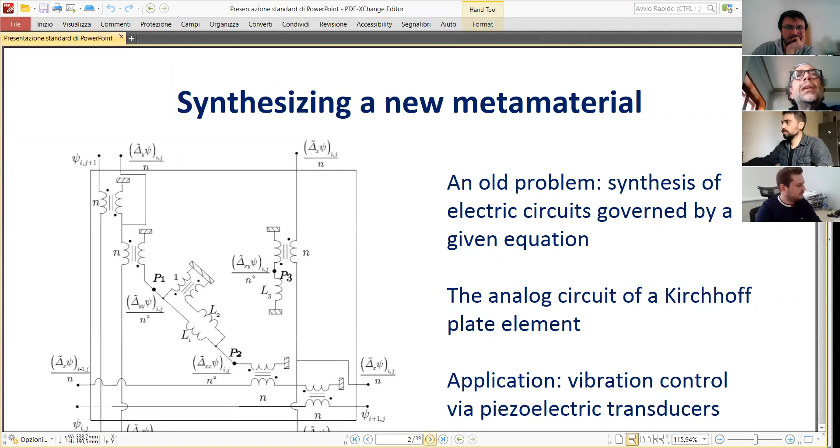Then I will only talk about one specific equation, which is this one — I don't know if you see it fully. This is a deformation energy, where F is the gradient of placement. We are talking about a plate, and you have two directions: the direction of this beam, which is D1, and the direction of that beam, which is D2. This is an energy which we want to synthesize.

So given this energy, we want to find a microstructure which, once homogenized, gives you this macro deformation energy. Mathematically speaking, you have shear, which is given by this term, which is the measure of the deformation energy related to this change of angle you see here. Then you have elongation, the elongation of one of these or the other beam, and it is represented by this term in the energy. After homogenization, I mean, when you have many elements of these which are reproduced in your system.

And this is the bending term, which involves the gradient of capital F, therefore the second gradient of placement. Even if the technical details are not very important in this context, what I did, giving this energy, I have found a microstructure which, once homogenized, gives you this deformation energy.

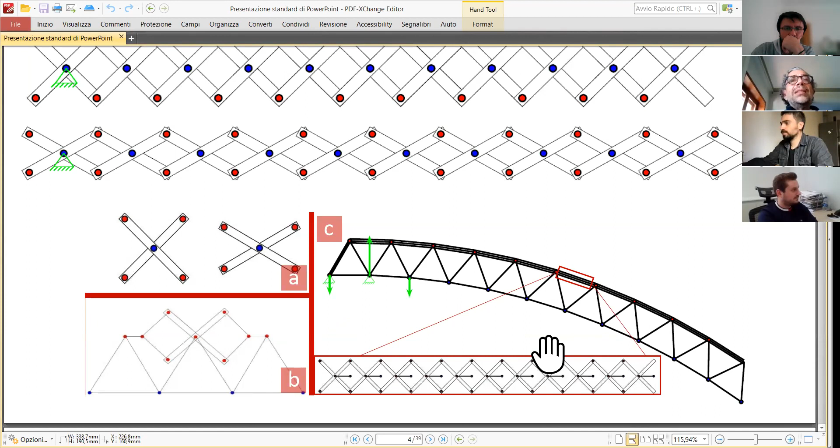I could also invent a material like this one, which is made of two families of orthogonal pantographic beams, and these deformations which you see here are all with zero energy if the pivots are perfect.

So you have a material which deforms in a homogeneous way in the plane without any deformation energy, which is what we want, because when you introduce a very small deformation energy related to the angle change in a pantograph, then you get...

A material which I can call a bipantographic sheet. This bipantographic sheet has a deformation in the plane, homogeneous deformation, if the pivots are perfect, which is totally energy free. So in a sense, they are what mechanical engineers call a machine, because you have degrees of freedom and the system is changing without a lot of deformation energy from one configuration to another among the allowed ones.

Once you homogenize this material and add a small deformation energy related to the shear deformation, then this becomes something which can be used in large deformation, remaining elastic in large deformations. Are these dreams only dreams, or can they be transformed into real life objects?

Okay, we printed this structure. If you see, we tried to get perfect pivots in this specimen as quasi-perfect pivots.

This material is made of two families of mutually orthogonal beams in the reference configuration. They intersect by means of some cylinders, which we call pivots. Perfect pivots have no torsional energy, so there is no shear macroscopic energy when you deform this sheet.

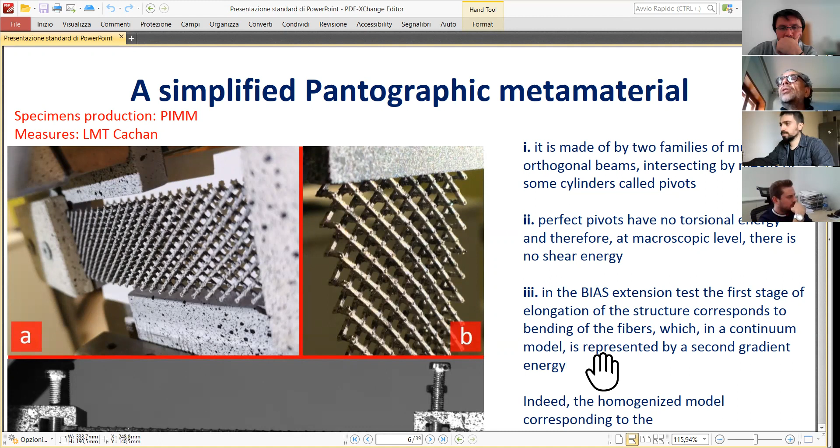In the bias extension test, the first stage of elongation of the structure corresponds to bending of the fibers, which in a continuum model is represented by a second gradient energy, which is rather unusual. In the deformation energy, you have a second gradient of displacement, which is rather rare in the literature.

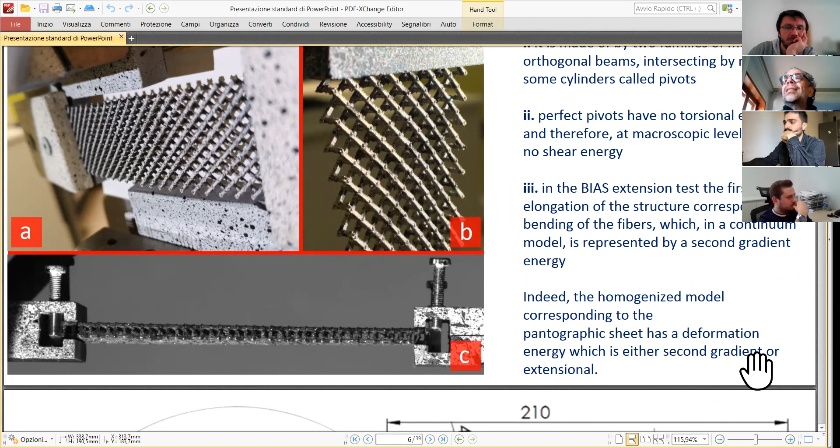Why is all this happening? Because the homogenized model corresponding to the pantographic sheet has a deformation energy, which is either second gradient or extensional. Either you have an energy related to the second derivatives, bending of beams, or you have an elongation of a bar constituting the system.

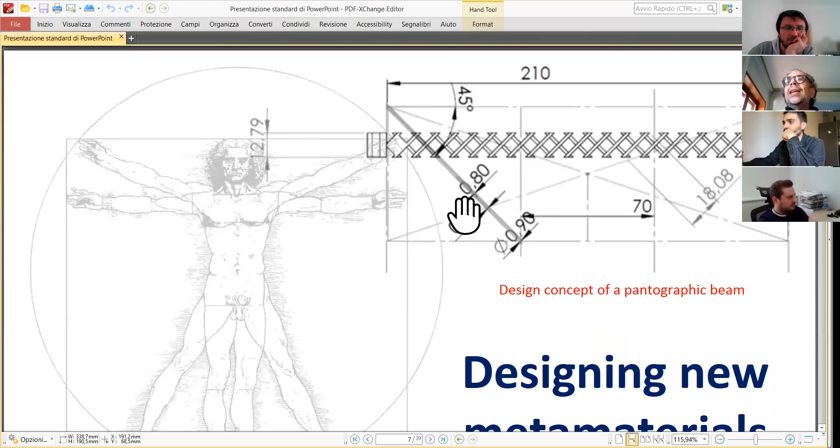A pantographic beam by itself is designed and printed rather easily with 3D printing machines, and you see that this is the shear deformation of this beam.

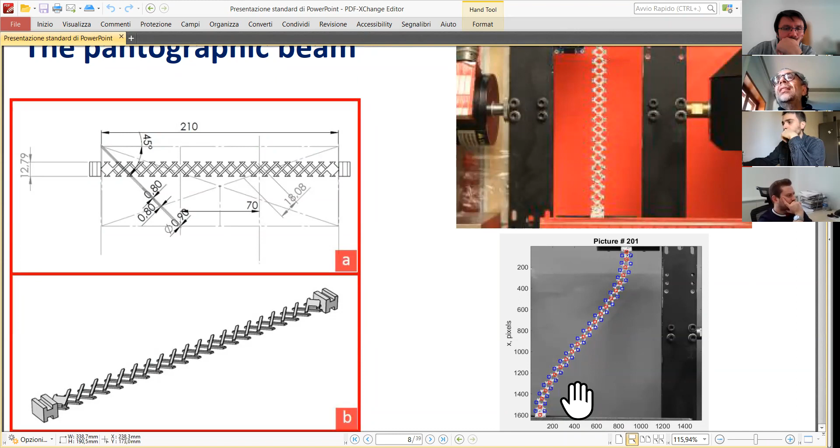This picture has been made in Berlin, and the dots are needed for following, in the digital image correlation, the displacement of this structure.

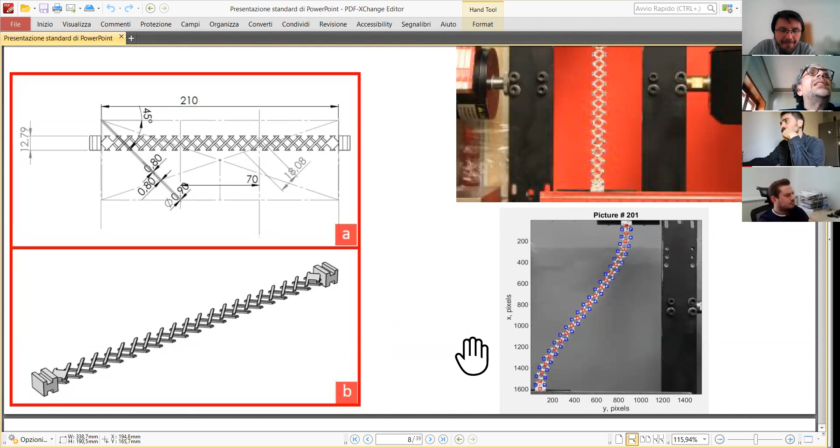By the way, it is rather difficult to teach software how to follow a mechanical system deformed in large deformations. We need a very sophisticated digital image correlation system, which I will describe later. Unfortunately, I don't have the movie because I'm using a computer which is not mine.

However, I can tell you what happens, in words: this beam behaves, in a range of displacements, like a beam. When you reach a threshold, it becomes a cable. So you have a kind of phase transition.

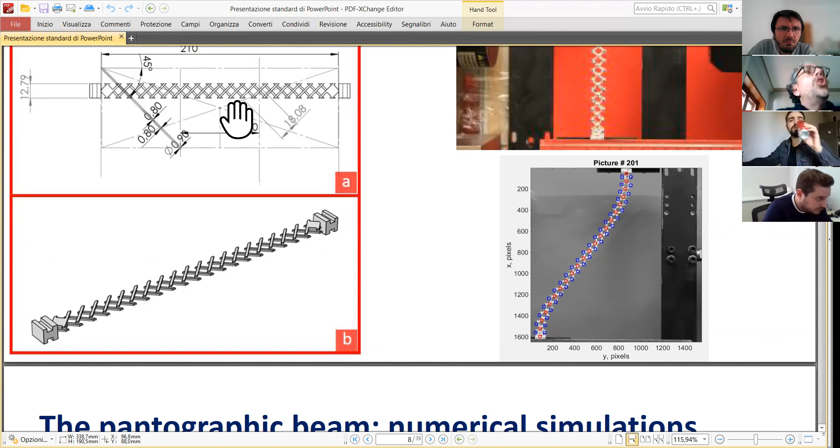When these two beams here, constituting the typical element of our structure, become parallel, then it becomes like a cable, because here you have pivots which are perfect at the top and at the bottom. So you have small segments which are articulated like a catenary in a sense. So this metamaterial has a mechanical phase transition inside.

However, many persons, when I described what we are doing, criticized our conception, because they said, okay, can you print perfect pivots? Now, the answer is yes, we can do this.

And this is the 3D picture of the CAD file which we have used. You can see here that this is exactly an internal cylinder. You have an external cave cylinder, and the internal cylinder is connecting the top bar and the bottom bar for getting a system of perfect cylinders, those typical of standard mechanical engineering.

And we could print the specimen, which is, this is the picture of the specimen, and we could prove experimentally that the behavior which I described to you before, so with this kind of deformation energies, which are associated with a very low deformation energy, are feasible experimentally.

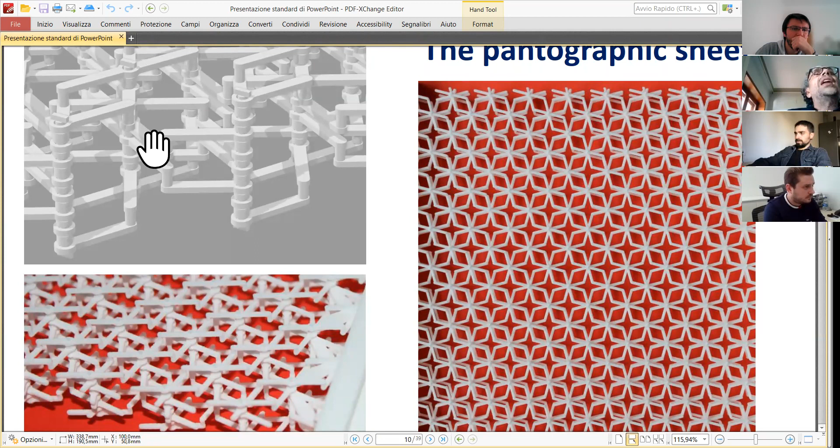The dream is, I mean, this is a big cell. The dream is to be able to build these metamaterials with small cells. So the idea is to build a kind of tissue based on this microstructure.

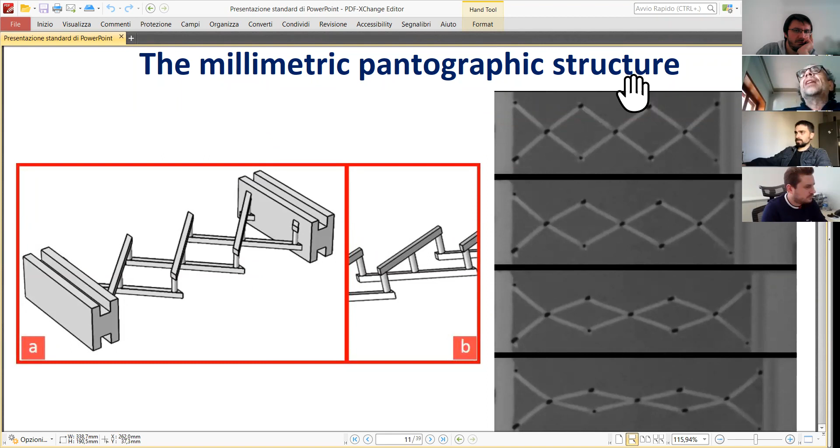And this was made when I was in Berkeley, where I met Erden. We started printing millimetric pantographic structures, which have been tested and fully studied in Kansas University, where Professor Anil Misra is working. And what we discovered is that the pantographic structure has a peculiar feature.

Its mechanical behavior depends on the mechanical behavior of this small pivot. When you change the diameter and the height of this pivot, then the overall macroscopic behavior of the system changes dramatically. Actually, for a fixed height, we could prove both theoretically and experimentally that the torsional stiffness, so the shear stiffness,

at macro level, in this figure here, you see the change of angle from here to there. So you have a shear deformation at macro level associated to a torsional deformation of this pivot.

We have proven that it goes with the fourth power of the diameter of this pivot. So a very small change of this diameter causes a large macroscopic change of mechanical behavior.

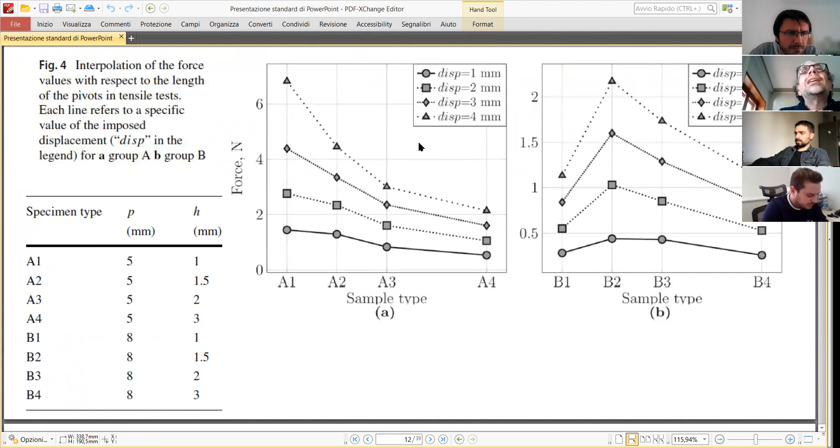This is also proven experimentally with pivots of different types. We have A1, A2, A3, A4, B1, B2. They are pivots. Here are the dimensions of the pivot in the millimetric structure, this one, okay?

When you impose this displacement here and you plot the force as a function of the displacement, what you get is that for a displacement of 1 millimeter, you get this force. For 2 millimeters, you get that force, and so on. So you have the dependence of displacement versus force.

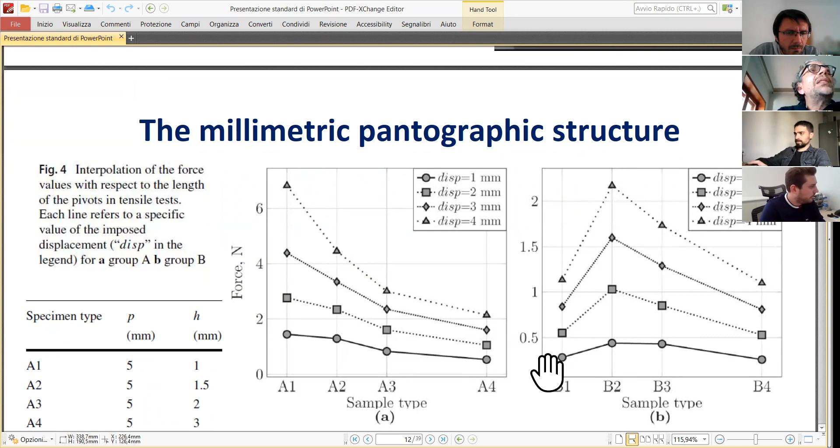And what you see with B2 specimens, so with a specimen having this B2 dimension, you get a maximum of the exerted force. And you can range from 0.25 up to 2.25, simply changing the parameters characterizing the microstructure.

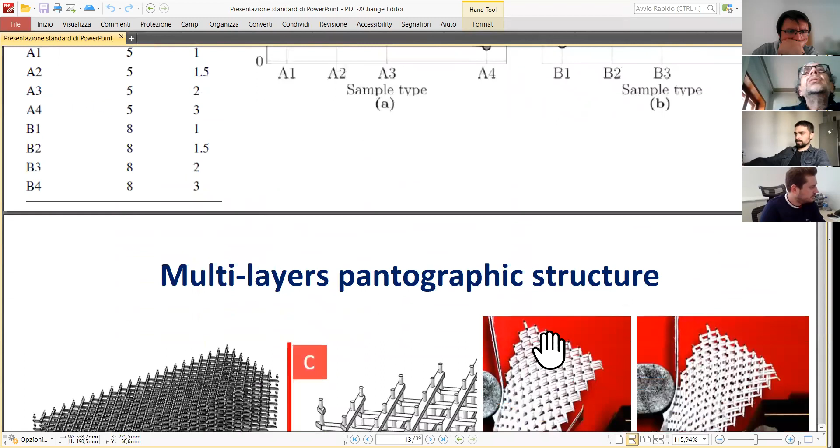So what it means is that with a very small change of volume, so changing a little bit the diameter of these pivots, you can get a macrostructure whose mechanical behavior is dramatically different.

Then we superimposed several layers of pantographic structures, and we have found that in a 3-point bending test, superimposed layers of pantographic structures have this very peculiar behavior. By the way, this deformation is fully elastic. If this moves up, the pantographic structure goes back to its original shape.

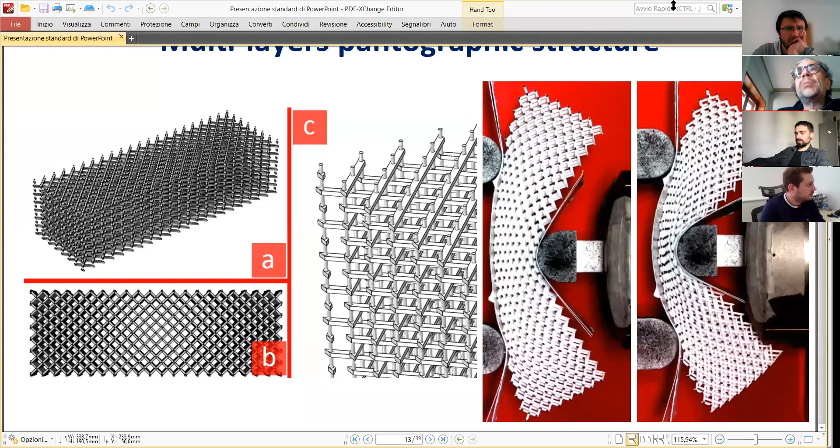And this effect can be very useful, for instance, in energy damping device. And with Erden, we are trying to exploit this effect in a specific problem in mechanical engineering.

So the question is, the technological bottleneck is how to design and print perfect pivots. As I already told you, perfect pivots seem to be very important.

Indeed, they are. But many persons were skeptical about our capacity of using 3D printers, leaving here, of course, in this drawing - it is exaggerated - leaving here the space, allowing for the relative rotation of this beam with respect to that beam. Okay, what happened is that we managed to do this.

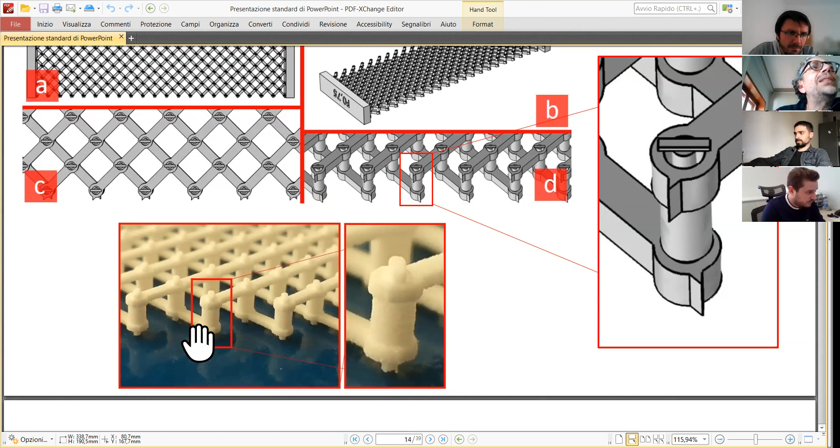We did it in Warsaw, and using a Formiga P100 printer, we could get specimens in which, without doing anything else than 3D printing, there are parts inside the printed object which move one with respect to the other.

This fabrication process up to now has been successful only with plastic pivots. With metallic pivots, this design is not working.

However, recently I started a collaboration with Fraunhofer Institute in Freiburg, and they are able, by changing this design and inventing a new design, to have a 3D printed structure in which metallic parts are moving one with respect to the other.

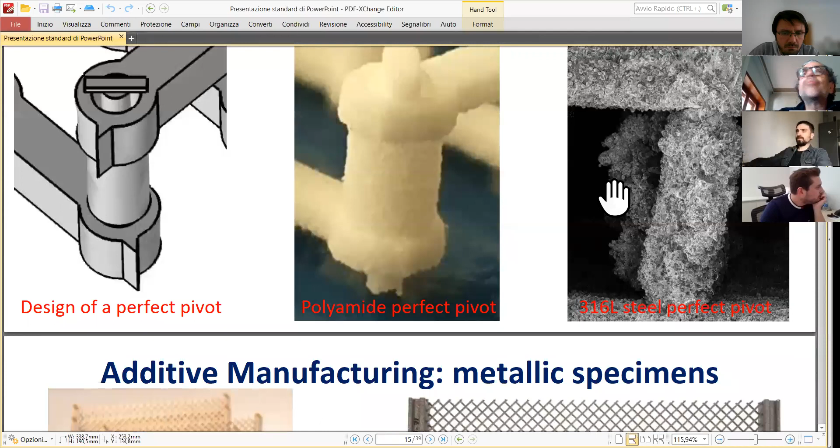So in the additive manufacturing of metallic specimens, we are having serious troubles. This is a specimen after printing. They need to be thermally cured for becoming straight, and it can be very difficult. But at the end, at the Fraunhofer Institute, they did manage to get straight specimens. However, we discovered, this is a microscope picture, that these pivots are not rotating, and they are broken after deformation in this way.

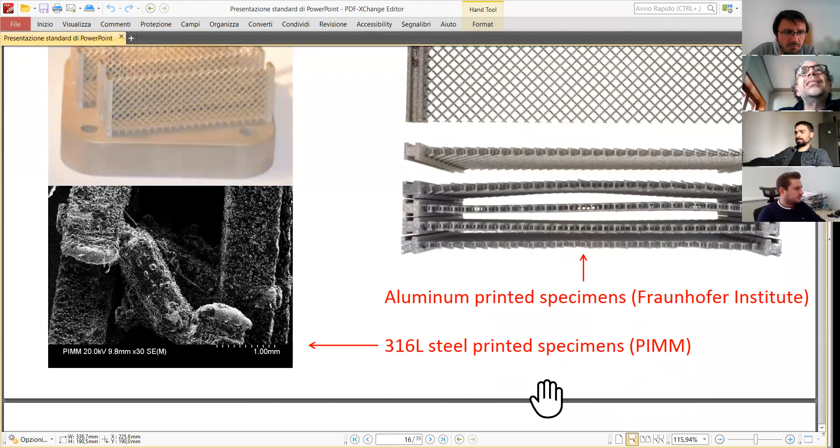So we needed to develop a better design. This is a rather difficult problem in mechanical engineering for getting perfect pivots, which at the end could be printed also in metal. Even if I don't have pictures here, we did not publish the papers yet, and my co-authors did not allow me to show you the design.

If you zoom at different length scales, the specimens we are considering, at this length scale you can use the model beams. If you zoom in further, you can use only the three-dimensional continuum model, which, by the way, if you look at the grain size, is rather inhomogeneous. We'll come back to this point later.

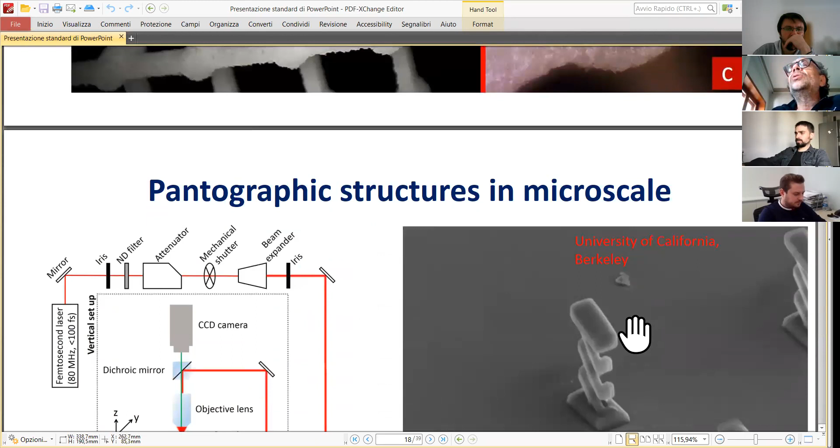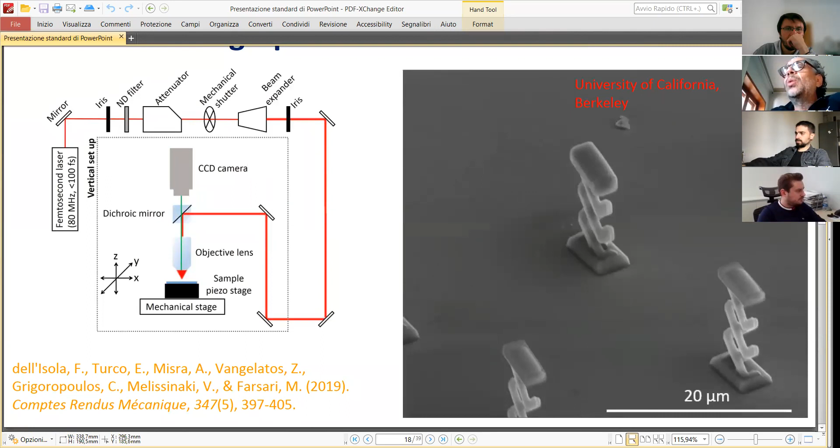As I told you, when being in Berkeley, we decided that we wanted to do better. Zacharias Vangelatos, who is now working in a company and left academia, had the clever idea of printing these specimens, which are 20 micrometers. These specimens have been tested, and we could prove that what happens for millimetric, centimetric, millimetric pantographs still occurs in micrometric pantographs.

So what we are studying is not the specific material or a phenomenon which occurs at a specific length scale. We are studying the mechanical behavior of a microstructure, and this is very important for what we are telling.

This is confirmed by a casual circumstance. Two colleagues from Germany, the family Hesch, husband and wife from University of Siegen, Christian, I'm sorry, I forgot the name of his wife, they studied this tissue. This is a standard tissue made of carbon fiber, embedded in a matrix of a polymer. And they repeated the bias test.

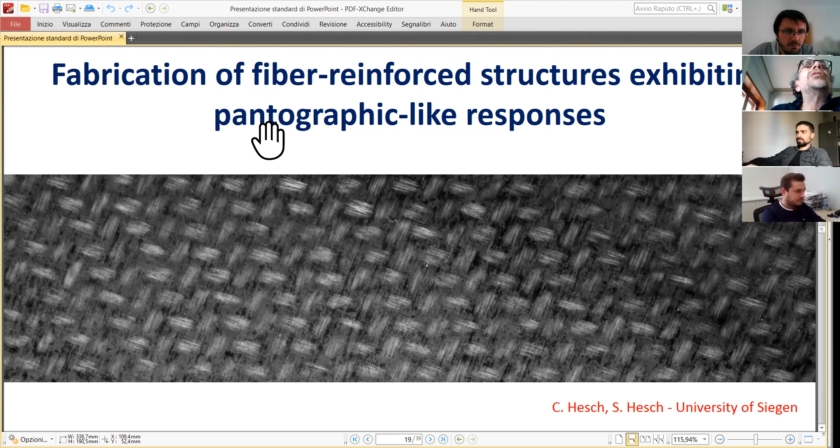In this region, the warp and the weft, the fact that the fiber goes down and up and the other fiber goes up, produces a kind of pivot. And actually, this material behaves like a pantograph. It has a pantographic-like response. So this is a property of materials having a certain microstructure.

So whatever is the lower scale material you are using, aluminum, nickel, polymers of every kind, or carbon fibers, the dominating mechanical effects at macro level are dictated by the pantographic microstructure. And this is a small theoretical discussion which we are trying to develop.

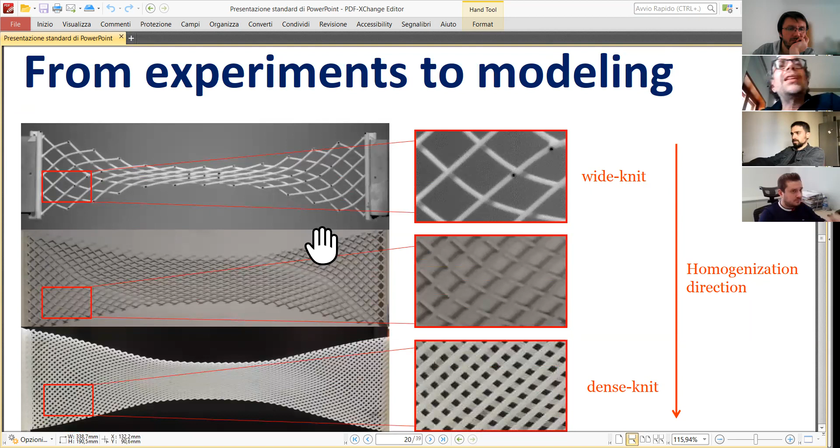The theoretical discussion is about homogenization. If you use this wide knit pantographic structure, this intermediate knit, and this dense knit pantograph, you discover that at macro level, the behavior of all these three is the same. And this is rather unexpected. We should find theoretically the reasons for which this is true. All these three structures behave governed by the pivots properties and the bending stiffness of involved beams.

However, here you have a very nice phase transition. When beams touch one with the other, in the center of this material, you get a standard three-dimensional continuum, exactly as those which we are studying and teaching for our students. So you have a kind of second gradient material, which after a big elongation becomes a first gradient material.

If the mechanical properties and the geometrical properties of the considered architectures are well optimized, then your material remains in the elastic regime when it arrives at this level. So you have a material which for certain displacements behaves like a second gradient material, so large elongations are allowed, and when you reach a given threshold, it stops behaving like a second gradient material and starts behaving as a standard one.

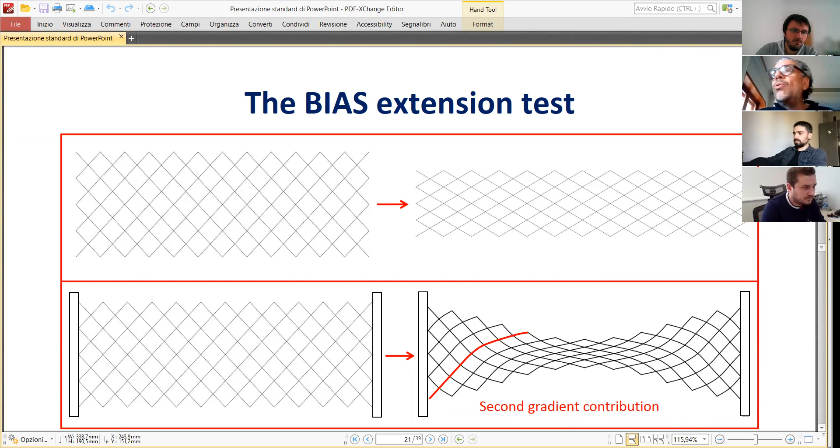If you block the distance between these beams and you elongate, then the bending of the beams becomes dominant in the deformation pattern. Everybody knows that in the deformation of a beam, second derivatives of displacement occur, and at macro level, after homogenization, you get a second gradient continuum.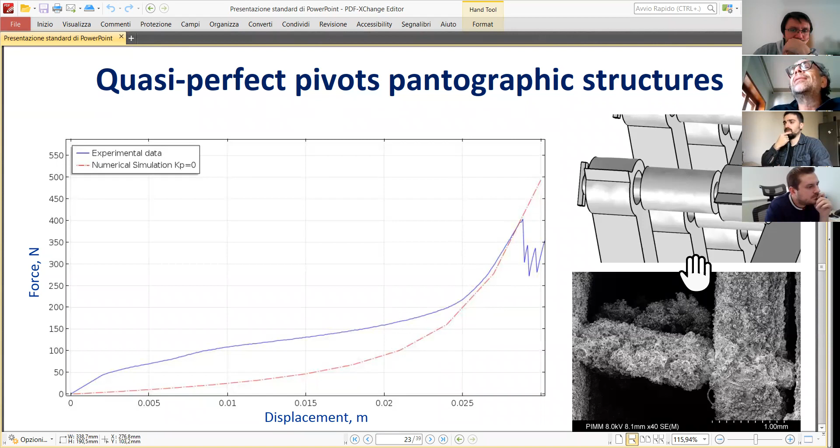Then when we made experiments with so-called quasi-perfect pivots, pivots which are nearly perfect but not printed exactly as they should be - in red, you see the plot of the numerical simulations forecasting the behavior of a perfect pantographic sheet, and in blue, you find the experiment. So you see that more or less, we are going towards the desired behavior in our experiment.

And this is the experimental plot also after rupture, when you have the famous phase transition I was talking about. So the beams are touching one with the other so that you have a stiffening of your material. So you have a kind of material which has a certain stiffness in one deformation regime, and a much higher stiffness in another deformation regime.

If we manage to design the pivots and the structure in an optimal way - and I have partial results in these aspects - then we will have invented the two-phase material which we are looking for: first phase, second gradient; second phase, first gradient material.

Now, somebody told us that this specimen is behaving very well, but it is useless because it could buckle, it could not resist in shear.

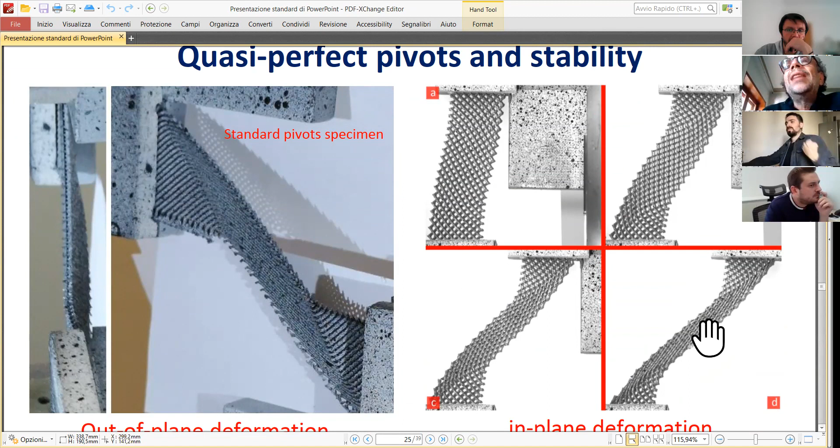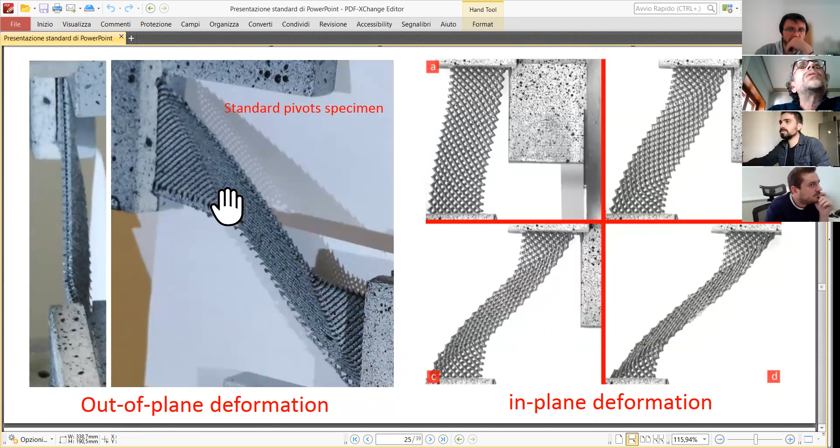So we developed shear tests, again in Berlin, and this is a very nice pattern of deformation. As you can see, this specimen still behaves as a second gradient material also in shear deformation. The only problem is that sometimes this material buckles, so it gets out of the plane of deformation, but in a way which is not catastrophic, and by the way, totally described mathematically.

These specimens are damage tolerant. This is a specimen which, for a reason we could not understand, has been printed with some small defects.

So while testing it, we had some jumps in the plot of displacement versus overall force. By the way, we are talking about 100, 200 newtons, so it is rather stiff for being such a light, not heavy specimen. So what happens? One beam is broken, but it keeps doing its job.

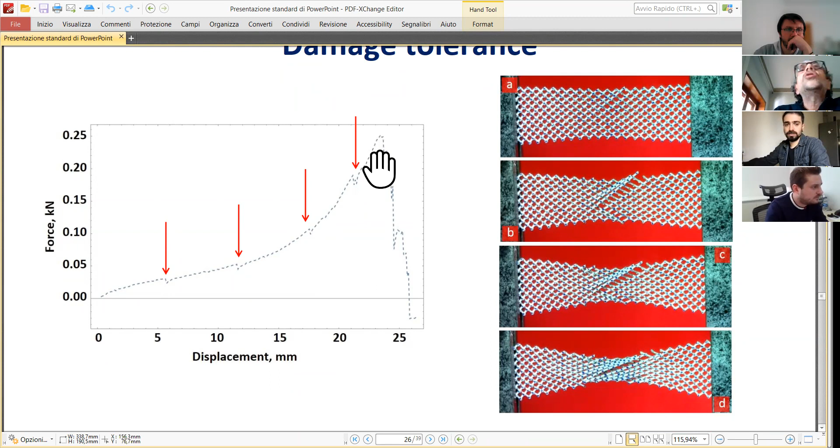So we are optimistic that this microstructure produces a damage-tolerant metamaterial.

I hope that you allow me 2 minutes of philosophical considerations, only 2 minutes. Without a theory, you cannot design experiments.

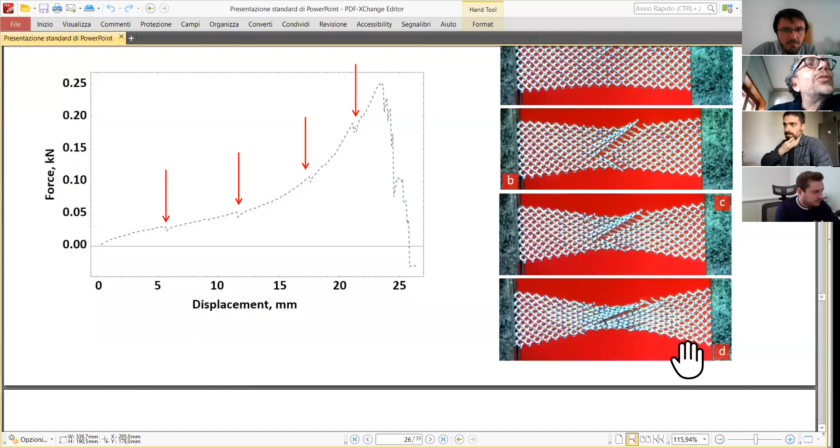We could design this metamaterial simply because we had a very careful mathematical model and very good numerical simulations, which allowed us to forecast the behavior of the specimens which we were going to build. Of course, if in the building you have defects, then you get a different behavior. It is rather difficult to get such a well-ordered microstructure, but actually we are succeeding in this.

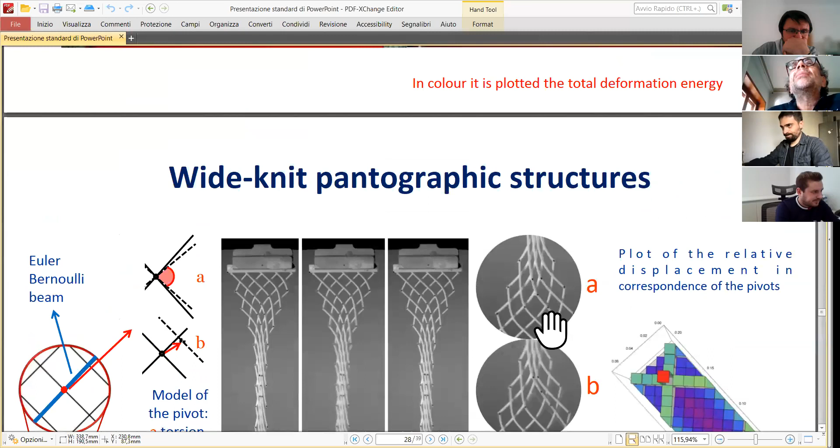We discovered that there are other damage patterns. So for instance, look, this pivot inside is broken. So we discovered that our mathematical model, the one which has directed us in this part of experiment, was not...

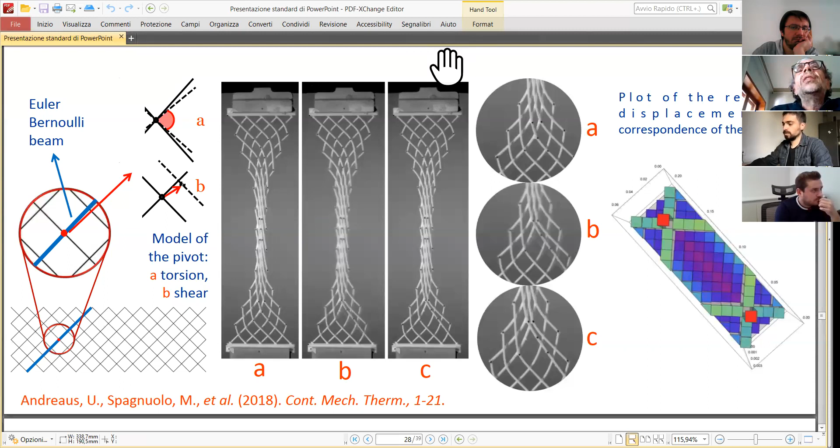...efficient enough. So we were obliged to modify this model. And we did this in this paper here. And in this paper, we introduced one displacement, always a homogenized model, but one displacement for the upper array of beams and another displacement for the lower array of beams. And we introduced an elastic energy describing the behavior of one pivot.

So either we have a one field model or a two fields model. In the one field model, you can describe only this rupture phenomenon, which is related to an elongation of one beam. So you have a kinematical descriptor for this elongation. Instead, with a one field model, you can never describe these other two mechanisms of rupture, which occur in some pantographs with some microstructures.

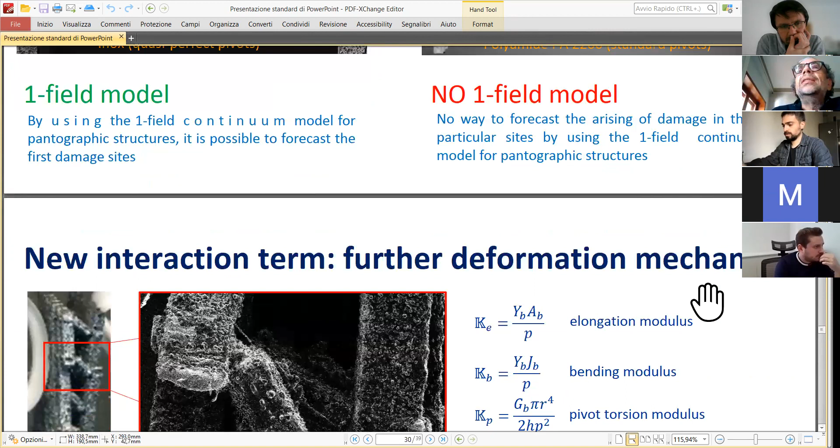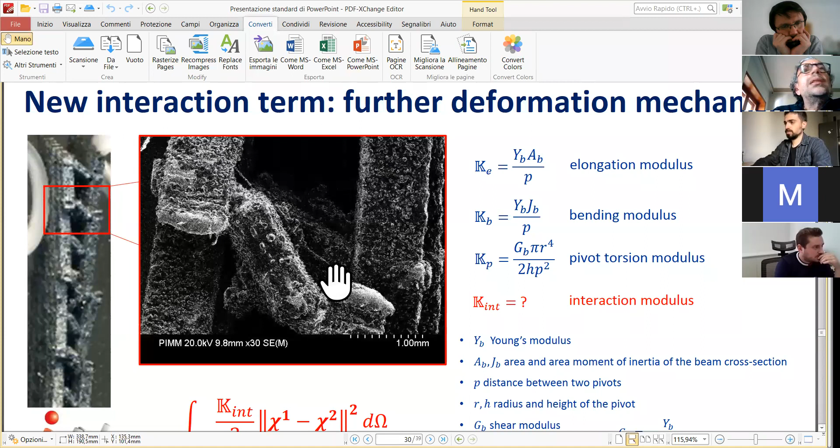So what we did, using the pictures we have about one pivot, we imagined a deformation energy. So together with elongation modulus, bending modulus, pivot torsion modulus, which at macro level becomes shear deformation, we invented an interaction modulus.

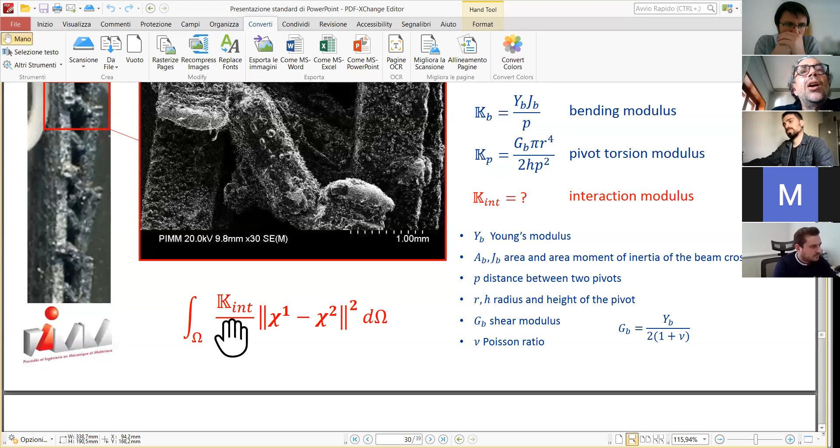And we added in the energy the distance between the placement of the upper layer of beams minus the placement of the lower array of beams, times this stiffness. This is the standard stiffness of a spring.

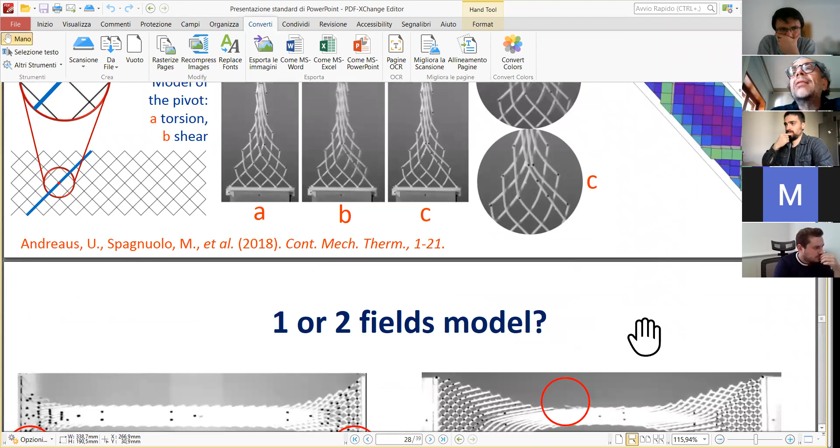And using this energy, we could prove that the concentration of deformation energy in the pivots are either here, causing this rupture which we have described there, or here, causing the rupture which is described there.

So, standard continuum models are not good for describing these systems. We used a second gradient continuum model, a model where the second gradient of displacement appears.

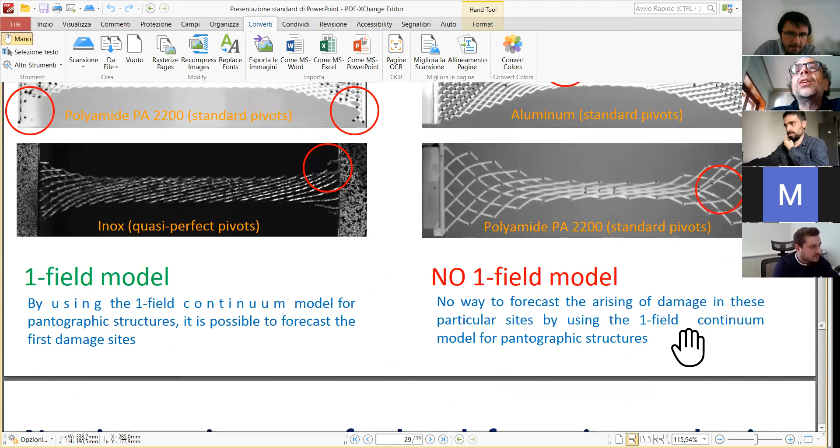Actually, we invented this microstructure for finding this kind of behavior. Then this phenomenology urged us to develop a two-field model, and using this two-field model, we did manage to describe also this rupture phenomenology.

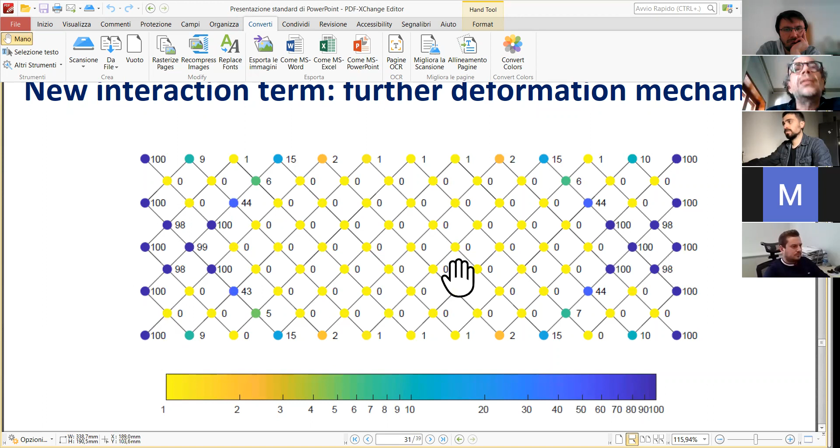And we optimized this specimen choosing the correct stiffnesses in order to have the rupture here the latest possible. So we found the distribution of torsional stiffnesses of the pivot such that the elongation was minimal, the elongation of each of these bars all along the structure. In this way, with this distribution of stiffnesses, we can increase by another 20% the maximum elongation before rupture, enlarging the elasticity domain of this new metamaterial.

Okay, now another question, I have 7 slides before ending. One could ask me, why did you study continuum models for these structures? The question is that we can have meso models introducing beams or micro models describing every beam at micro level, at the level of the grains, using a standard 3D continuum model.

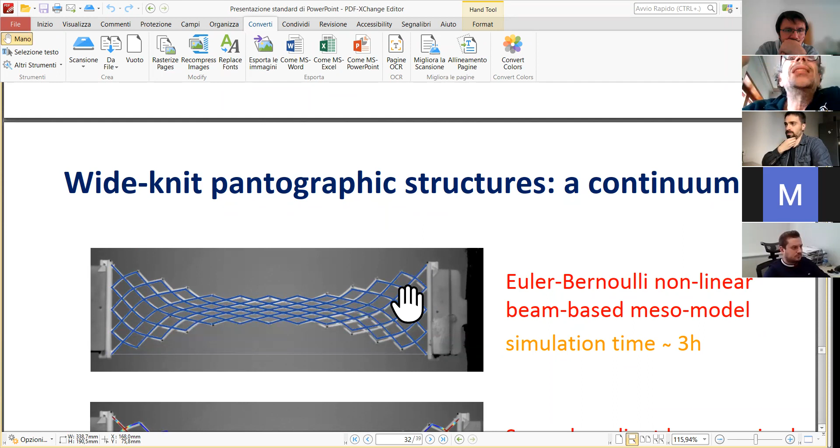Using Euler-Bernoulli nonlinear beam-based meso model, we needed 3 hours for doing this numerical simulation. Using the micro model for Cauchy continua, we needed 3 days. It was 4 million degrees of freedom numerical simulations, and we have a rather good computer which cost us 12,000 euros.

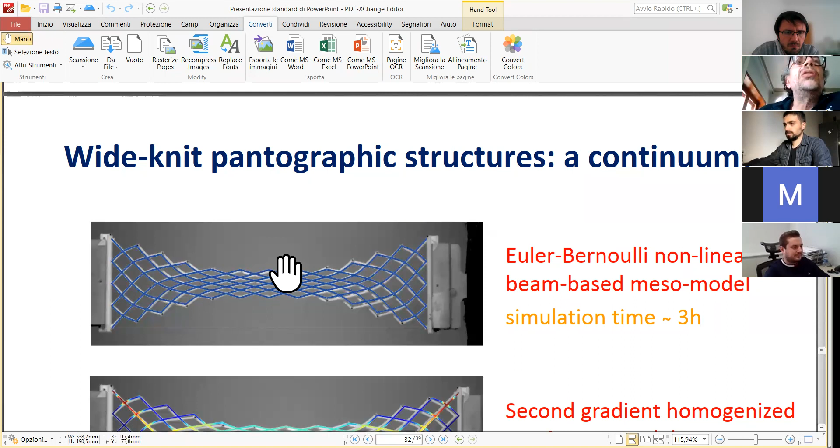So we needed a lot of time for getting this prediction in the nonlinear regime. If instead you use a second gradient homogenized continuum model, you need 3 minutes. Now, if you want to find this optimized scheme, you need to solve the elasticity equilibrium problem several millions times.

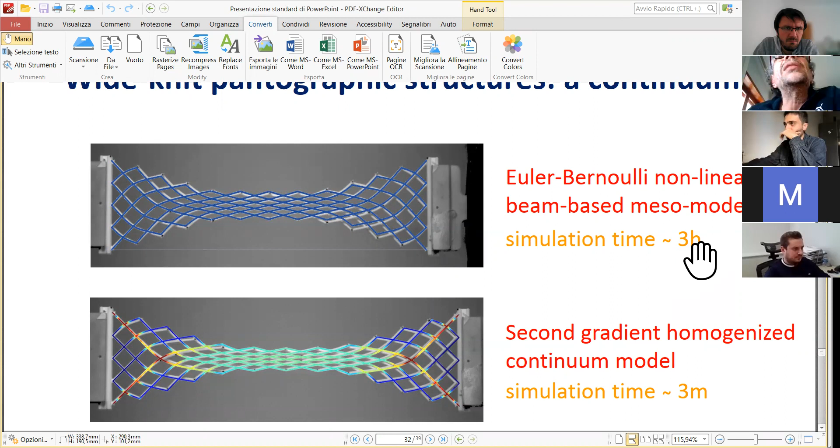So if each simulation lasts 3 hours, you are lost. You cannot find the optimized structure. If you have 3 minutes, this is feasible, and we did this.

Okay, now I want to give some hints about what we have done with image analysis for checking the quality of our theoretical models. Now, also in image analysis, you can have different layers, different length scales in analysis.

If you study at this length scale, you can use a mesh like in the digital image correlation scheme. If you want to use a meso model, the mesh is one that finds every beam with a small number of elements, fundamentally 3 finite elements. If instead you want information about what happens at the grain scale, you need a further detailed mesh, also in digital image correlation.

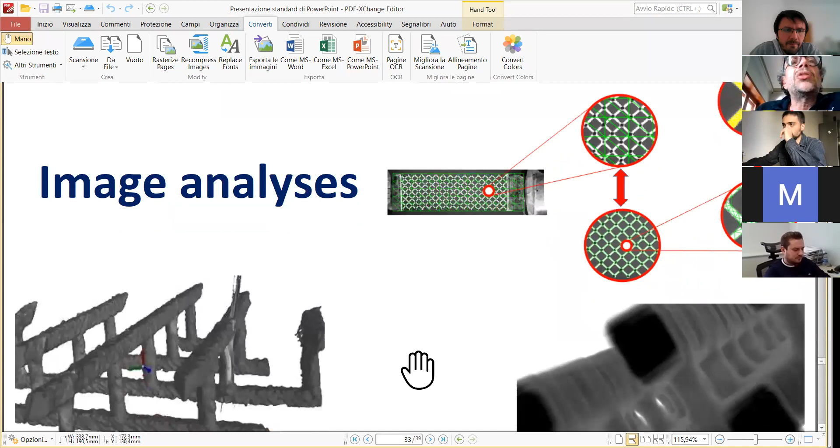In the École Normale Supérieure de Cachan, now Paris-Saclay, we did tomographies of these specimens, and this length scale could also be reached.

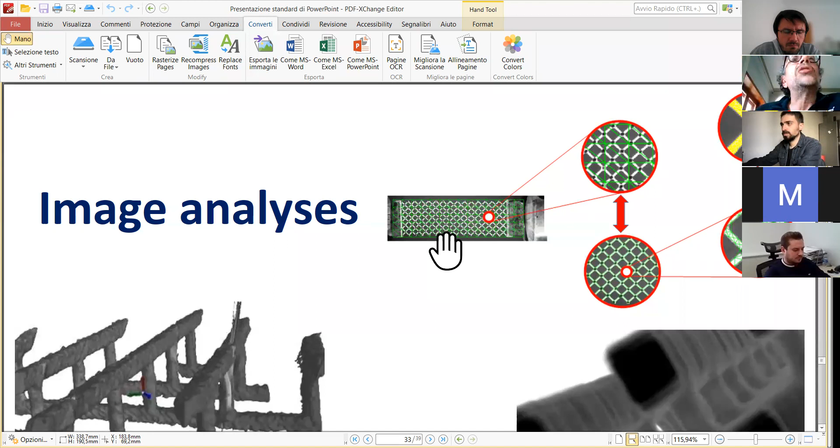Now what is very interesting is that using digital image correlation, you need to tell the numerical scheme elaborating images where it has to find a certain part of your structure. Because in large deformations, it is not obvious. Imagine the poor software, how it can understand that this cross is here and not that one in the actual picture.

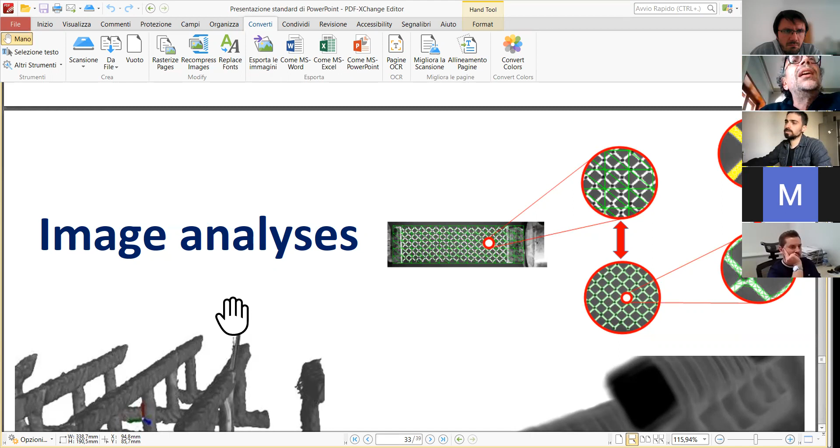I'm very proud to be co-author of a paper whose main idea was by Francois. In the digital image correlation scheme, he used the theory. So what he did was tell the software to go and look for the speckled pattern in the reference configuration, deformed in this way, in this place, and try to find it. This place and the speckled deformation were calculated using the mathematical model which we gave him. So digital image correlation is driven by the theory, as everybody knows well if he studied a little bit of philosophy of science.

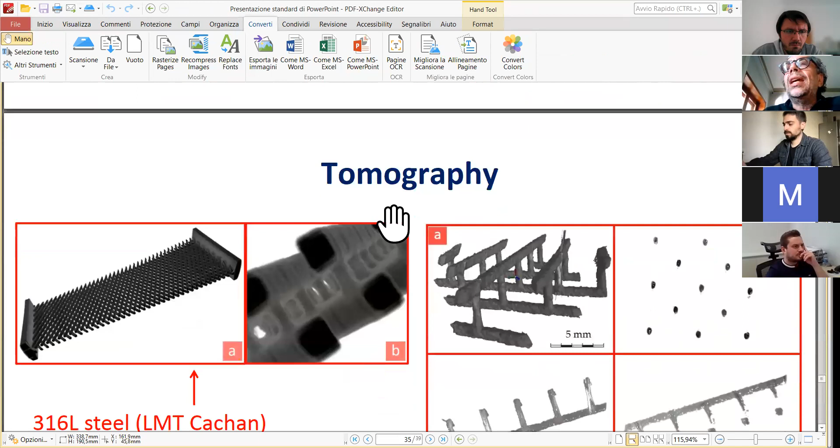We also did experiments in Stockholm on the dynamics of these specimens. I'm rather late, but I'll tell you we got very nice agreement between our theory and measurements. I show you some tomographic pictures made in Fraunhofer and in Cachan, which describe in greater detail how the specimens are made.

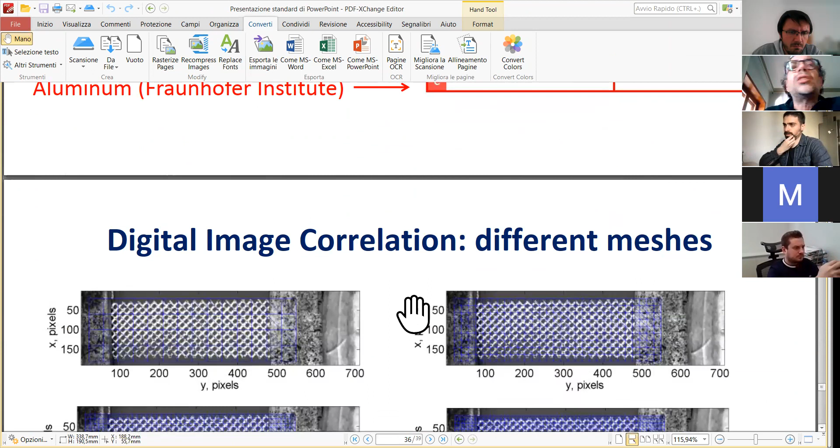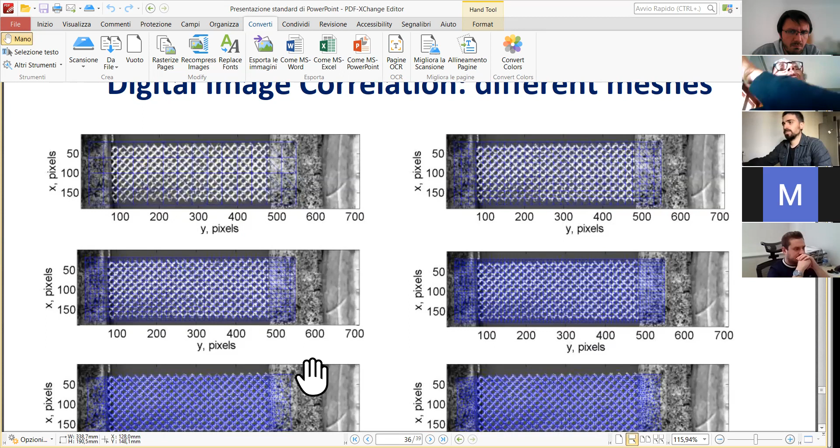I mentioned digital image correlation with different meshes, so you have different meshes and different analysis at different length scales, with different models used for following the deformation patterns. This is what was called the backtracking procedure: you know where you are looking for a certain deformation pattern, and then you go and find it where you predicted it should be.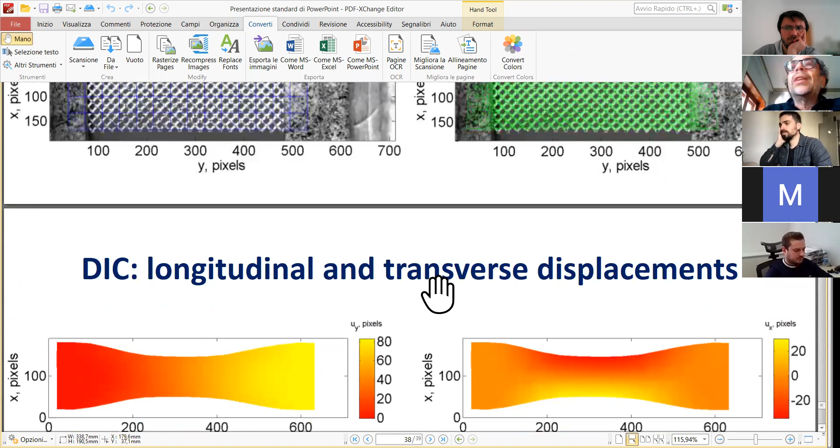You get this digital image correlation using a continuum model, and this digital image correlation using the meso model coupled with meso digital image correlations. At the end of the story, which is the lecture we should learn, you have this system. Forget that I invented it because I needed a second gradient material—this system exists. So how do you want to model it?

If you are happy to average what happens in this square of 5 millimeters side, then you can model this with a second gradient continuum. Of course, the second gradient continuum doesn't tell you in detail what happens at 1 millimeter length scale—it gives you only an average deformation, which is the advantage of second gradient continuum theory. You can get quick numerical simulations, and therefore you can do optimization.

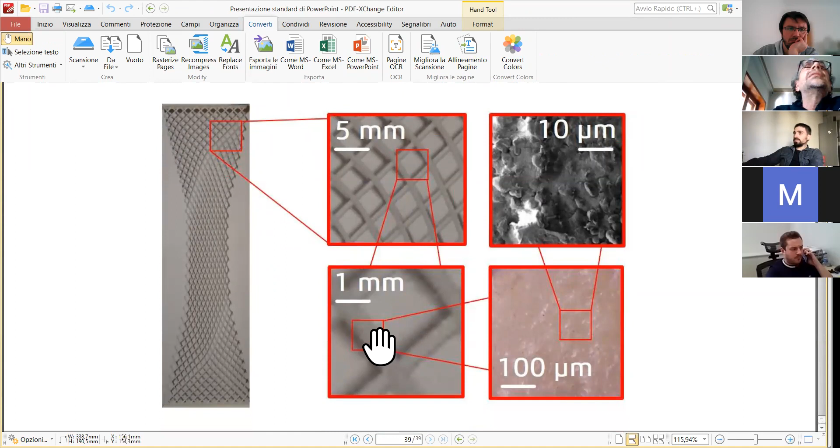On the other hand, maybe you are interested in what happens to one beam, so you use a meso theory, with a set of beams interconnected by pivots, and you get longer numerical simulations. If by chance you are interested in what happens at the grain level of this polymer which constitutes the specimen, then you need Cauchy theory, standard three-dimensional continuum mechanics in which the deformation energy depends only on the gradient of displacement. But you need days of numerical simulations.

Finally, if you are crazy, or if you need to go to microns or nanometers, you will need more and more sophisticated models. So which is the message? There is no true model for this system or any physical system—it depends on the phenomena in which you are interested. At the macro level, at the level of mechanical engineers, the second gradient continuum model is very efficient. This is the message. Therefore, continuum mechanics has to be studied in a more general way. In a sense, this is an experimental motivation telling you why some theories need to be studied.

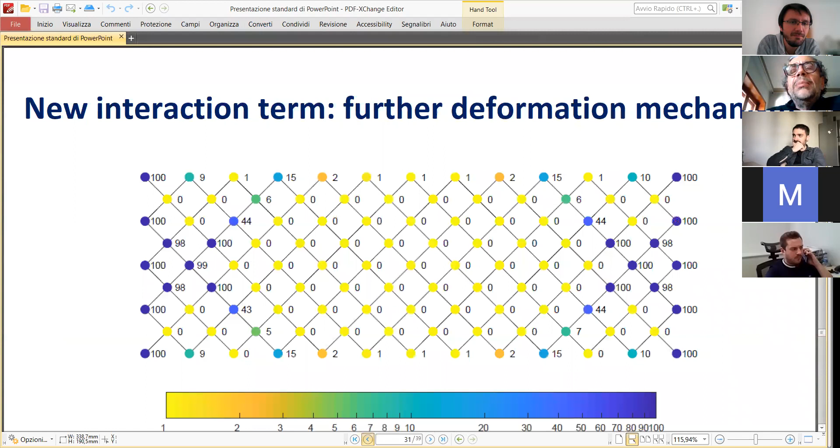But at this stage of the numerical solution, you are not solving it in the strong form, I guess, right? You are employing some numerical model. We are. Look, this is a very important question, and we go back to the first page, or maybe this one.

So what we are doing, this is a typical second gradient energy. We simply give to COMSOL this energy, then it uses a minimization scheme for finding the equilibrium shapes of the specimen. So we don't talk about strong equilibrium conditions and anything like that, which, by the way, numerically are very difficult to handle. So actually, we start from the weak formulation.

I see. And I don't know if you know, I'm not selling COMSOL, but I must tell you that COMSOL was written by clever scientists who became rich because of it, but this is not bad. COMSOL has been written by somebody who knows what the code is doing, and so it is very clear for somebody who knows continuum mechanics, and it is fully based on weak formulations.

I see. And you employ always finite element method to solve it, I guess, right, as you are using COMSOL? Yes, we use various versions of finite element methods, because as second derivatives appear, then you need higher order polynomials for handling it. And sometimes we used a mixed Reissner-Mindlin integration scheme with some Lagrange multipliers in order to get a quicker time of integration.

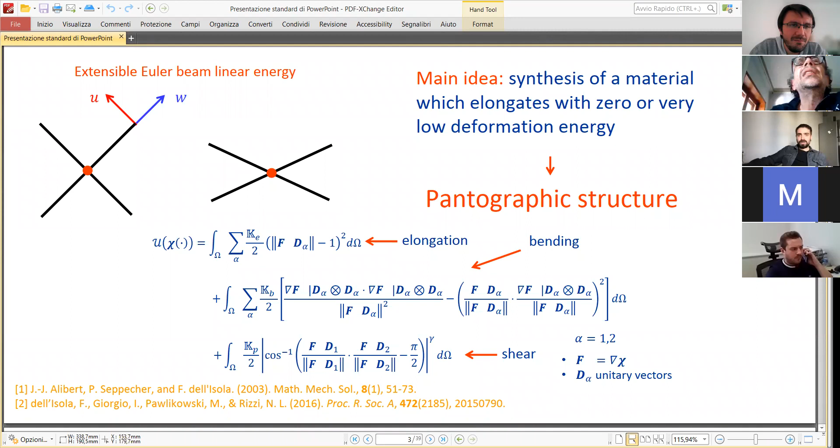So all this, my dear friend, is hidden in my presentation, but you know, the reason I ask this question is because you are talking about high order displacement and you need high order derivatives. If you need high order derivatives, you need high order shape functions to solve it. What if you use other approaches, for example, isogeometric analysis, B-splines and things like that, to be able to solve it even more efficiently without making a mesh on it, you know?

Indeed, in the M&MoCS group, there are at least 2 subgroups, one headed by Emilio Turco and Antonio Cazzani in Sardinia, and the other by Massimo Cuomo in Catania, and they used isogeometric integration schemes for getting the solutions. But I don't see a big advantage. I mean, instead of 3 minutes, they needed 2 minutes, 1 minute. So we didn't have this big advantage.

But of course, it could be that they didn't find the right isogeometric approximants. So I don't want to judge this, in the sense that everybody who wants to use isogeometric analysis for this is welcome, and we will help him, giving him all the details he needs for doing this.

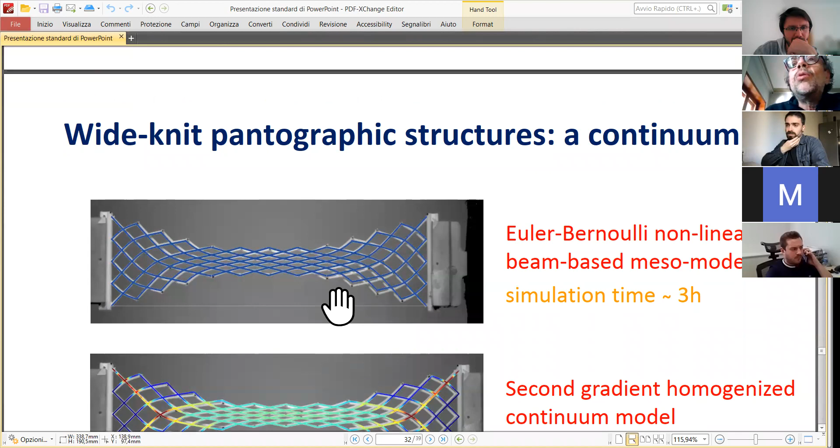Okay, I see. Then you have the level of the mesomodel, which is made of beams like that. And then you have the micromodel, which is not described in these pictures, where you zoom in at this. I understand that part.

Yes, you zoom in at this, but it is a nightmare which was done in my group, and we needed days after having optimized. The first numerical simulations required weeks, and you cannot rely on a numerical simulation lasting weeks. Then we managed to do it, but you know, it was very important.

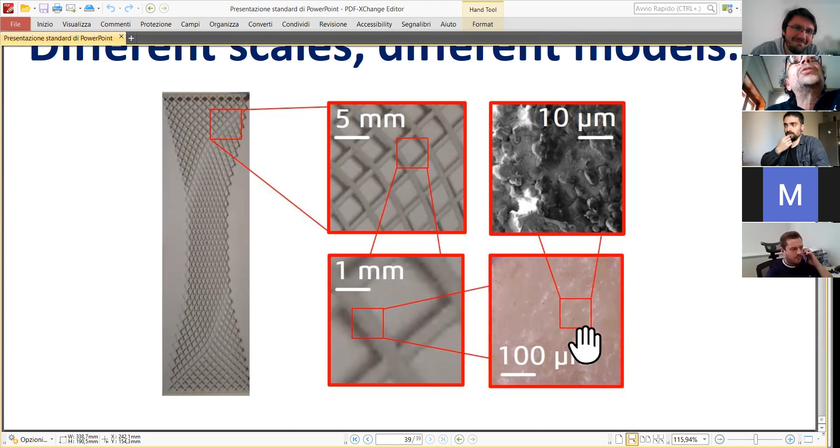I tell you, as you are asking, I'm happy to answer. You know, when you use a macro plate-like model like this, you have a big problem: what is KE, KB, KP, and gamma, for instance?

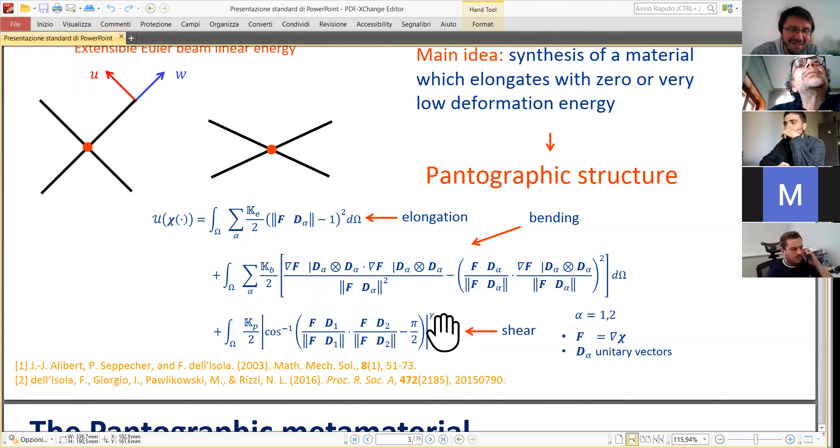At the beginning, we made a best fitting. So we made experiments and we fitted these parameters in order to get the results. Now, this fitting is very good.

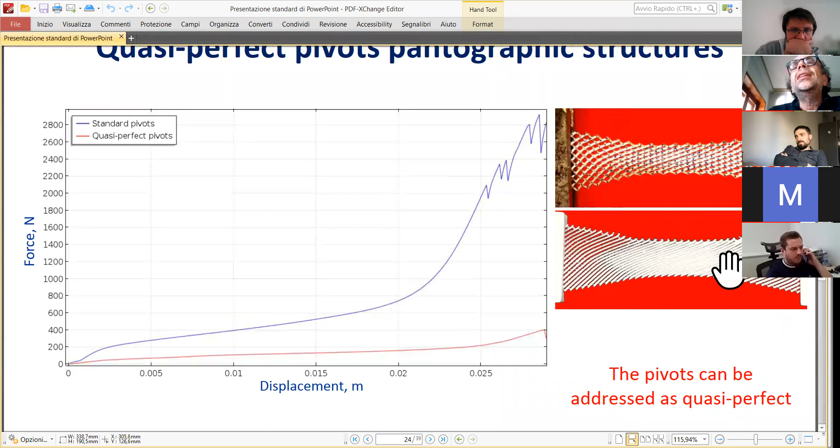Why? Because when you make shear tests, like this one, using the parameters which you fitted, you get the right results. So you are rather happy about this fitting.

However, Ivan Giorgio, who is now associate professor in L'Aquila, did what we have called a numerical identification. He made many numerical simulations using a 3D continuum model, and many simulations using the second gradient continuum model which I showed you at the beginning. He identified these coefficients, making numerical simulations at micro level using a 3D continuum. And then, don't pull our leg, but this happened.

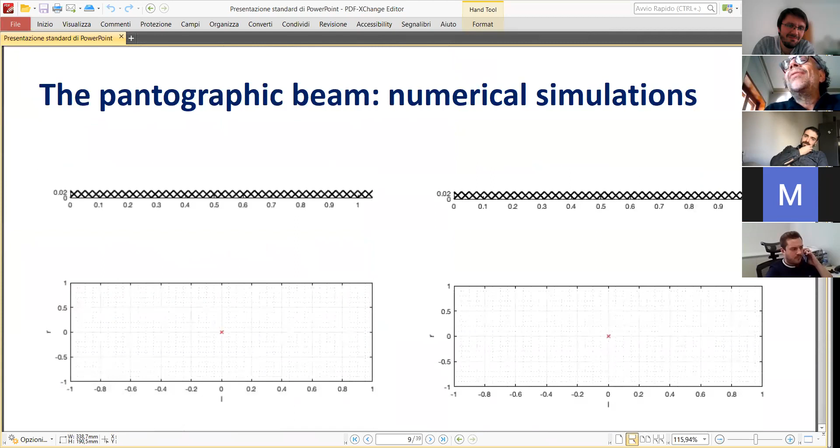We discovered that the order of magnitude given here is more or less good for this identification, because this pivot is not a beam, but it behaves in a way similar to a beam. So we have answered partially to your question.

Yes, sure. But you know, there is always something missing in science, especially when there is damage. These parameters should be updated in a sense, because there may be some plastic zone, there may be some fracture at some point, they need to be updated. But for the linear elastic region, it seems it's matching well.

I agree fully. And in the M&MoCS group, there is also somebody studying, using the methods of Marigo, damage of second gradient materials. So we are trying to get yield criteria using a variational principle of the kind used by Marigo. So there is a lot of space left, for sure.